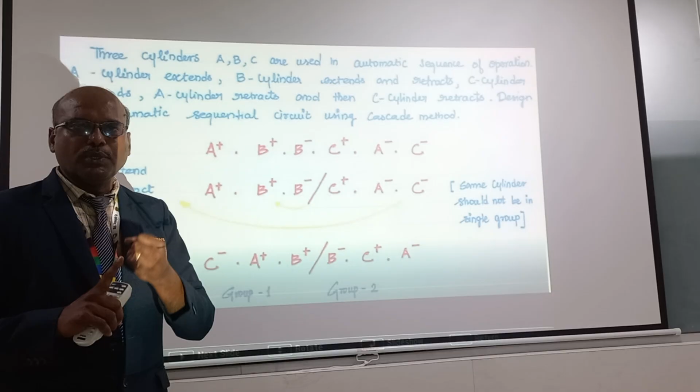First I told 5 steps. First one is forming a group. To form the groups, I should have the minimum number of groups. Second, no letter should be repeated in the same group. These are the 2 main conditions. So I am going to start the group now. First I write A plus, then B plus. B minus I cannot write, because as per the rule no letter should be repeated. So A plus and B plus are the first group.

So group 1. Then I start B minus, C plus and A minus. These 3 letters can be included in a single group, so this is group 2, and C cannot be included here because C is repeated. So C minus goes to group 3. That is A plus B plus is the first group, B minus C plus A minus is the second group, and C minus is the third group.

Now my objective is to reduce the groups. Now it is 3 groups. I have to reduce the 3 groups to 2 without changing the sequence. So I am going to bring C minus to the front. Now I can write this group as C minus, A plus, B plus. Now also I am not changing the sequence. Once C is over, only then A is going to start.

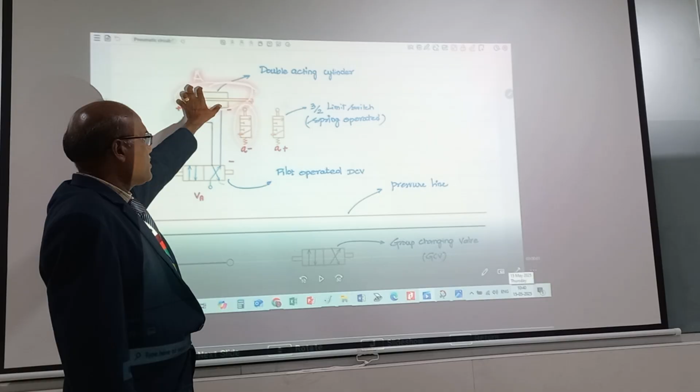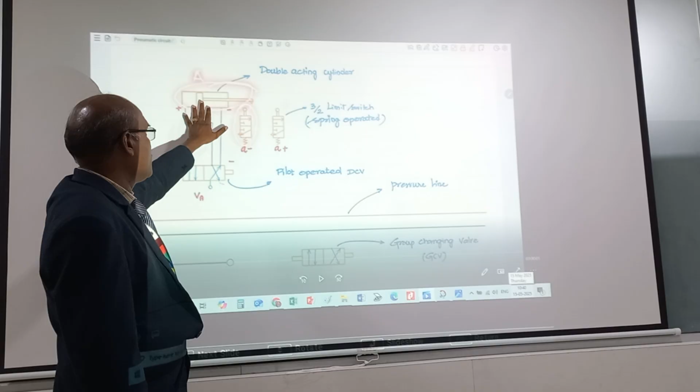So the double acting cylinder is required. Normally a double acting cylinder is used for any operation instead of a single acting cylinder, since it can be retracted or extended at will. Each double acting cylinder will require 2 limit switches. That's called a 3x2 limit switch. This is a spring operated limit switch, a 3x2.

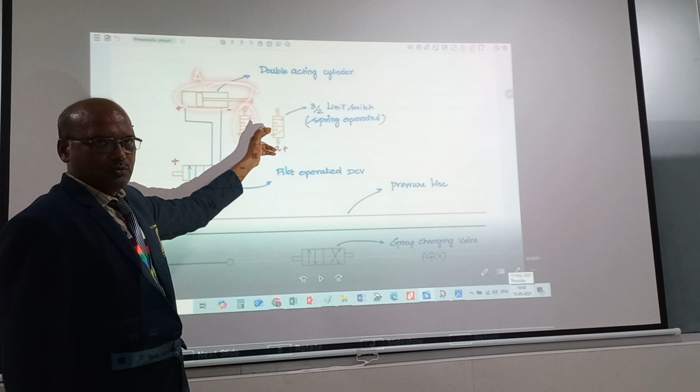Like the DC valves, you are having 2x2, 3x2, 4x2, 5x3, 5x2, 5x4; a lot of valves are there. Here you are using 3x2, a spring actuated DC valve. And each cylinder requires one DC valve. This is 4x2. Here also you have 2x2, 3x2, 4x2, 5x2. Here you are using a 4x2 valve.

4x2 means 4 ports and 2 positions. The ports are the 4 openings for the fluid to move: 1, 2, 3, 4. And it can operate in 2 positions, right mode and left mode. So it is called a 4x2 DC valve. It comes under pilot operated DC valves.

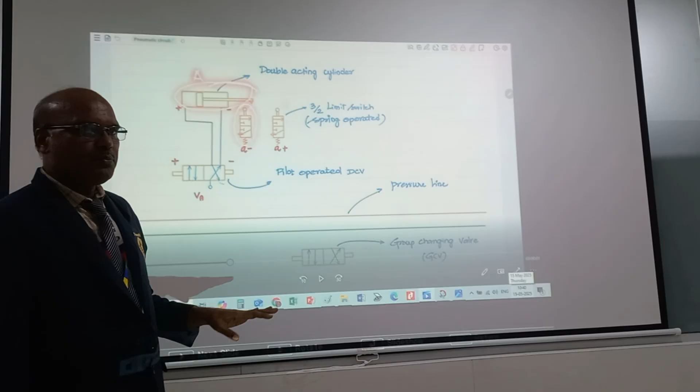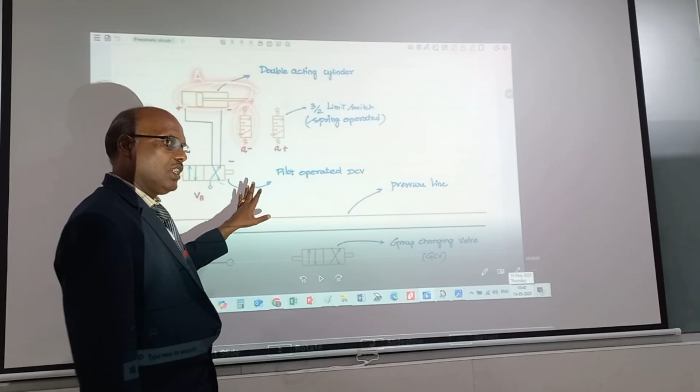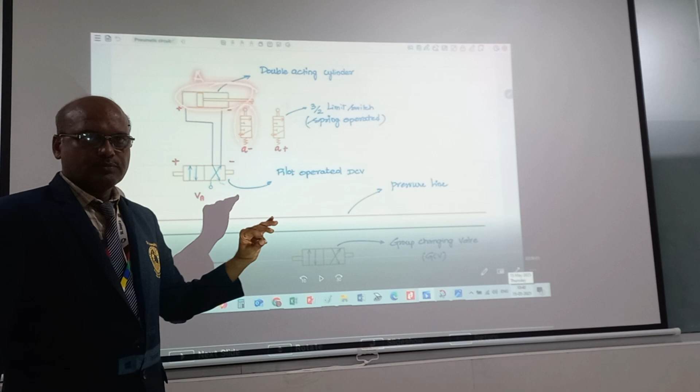What does pilot mean? There are several types of operation: manual operation, plunger operated, lever operated, a lot of operations. Here it is pilot operated. Pilot means moving the DC valve with fluid, either left or right. So here we have pressure lines that you have to draw. We will see how many pressure lines are required.

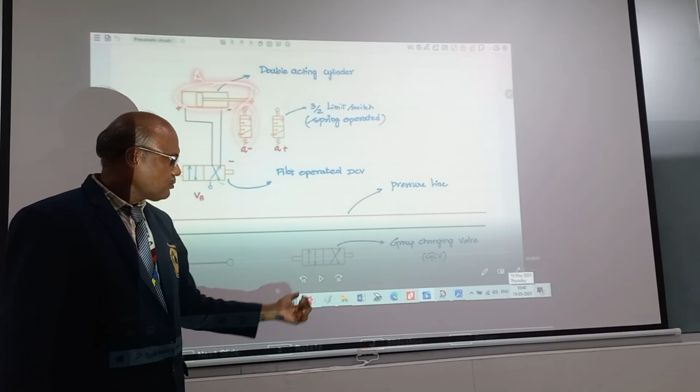And here I have one group changing valve, the cascade valve. This is also a 4x2 DC valve, similar to this DC valve. This is the main valve that changes from one group to another group. That is our group changing valve. Sometimes you may need 1 or 2 based on the calculation. These are the basic elements required for our design.

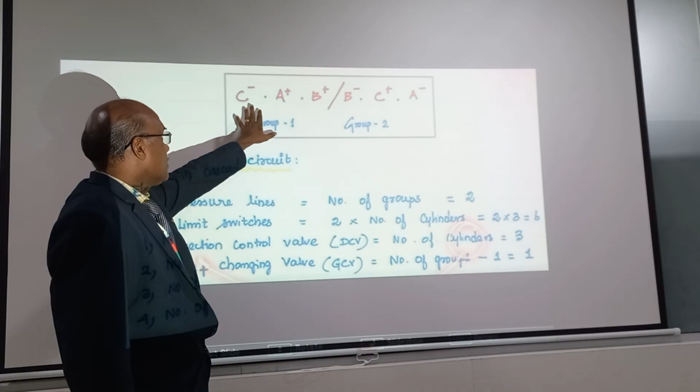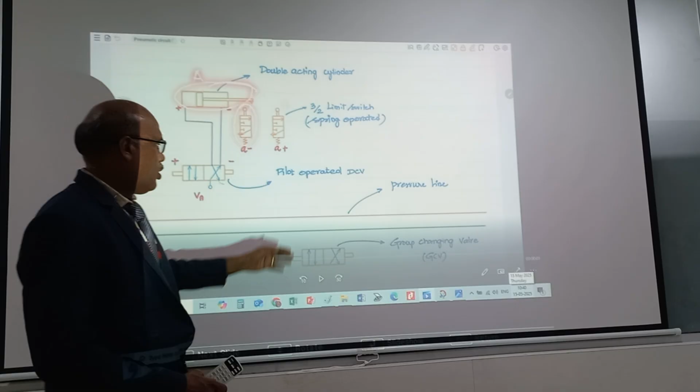Now we see the rules for the elements required calculation. Initially you have found out and decided group 1 and group 2, with no letters repeated. Then first you have to find the number of pressure lines required. The number of pressure lines is based on the number of groups. Since you have 2 groups, you require 2 pressure lines.

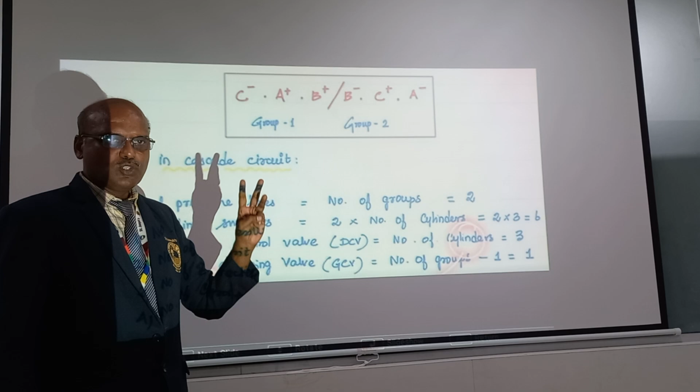Then the number of limit switches. Each cylinder requires 2 limit switches. We have 3 cylinders, so we need 6 limit switches: 2 into number of cylinders, 2 into 3 equals 6. Then you have to find how many direction control valves are required. Each cylinder requires one DC valve, so 3 DC valves are required. Number of direction control valves equals number of cylinders equals 3.

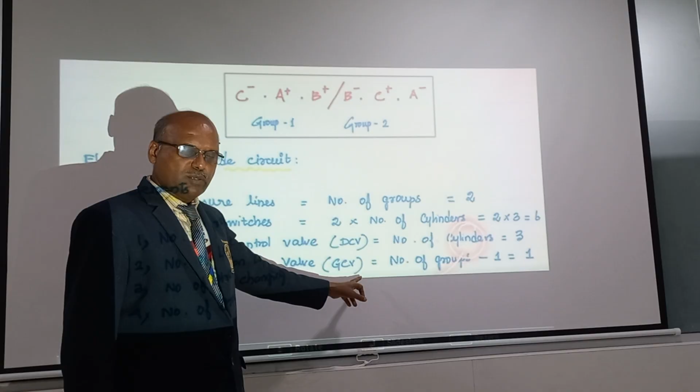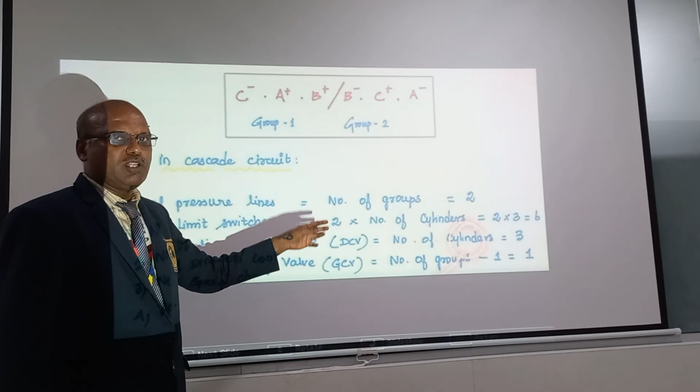The last one is the number of group changing valves, that is the number of cascade valves required, which equals number of groups minus 1. You have 2 groups, so 2 minus 1 is 1. That is my initial calculation. If you make any mistake in this calculation, your circuit will not come out correctly. So make sure you do not forget this formula before going to the change valve. Okay.

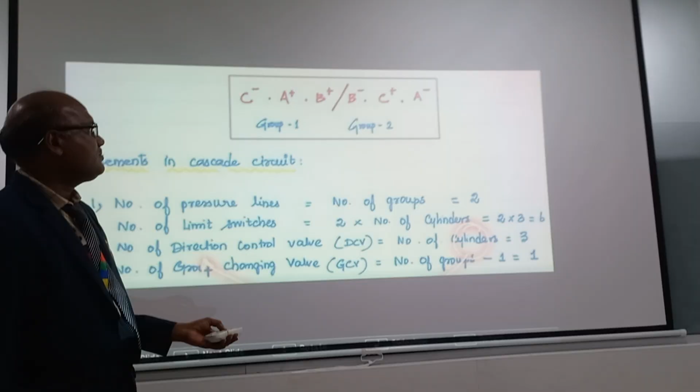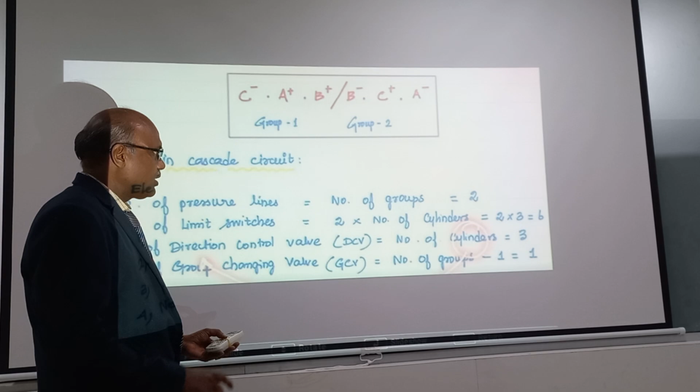Now we will go for the connection. We have seen all the rules and regulations for the formulas. Now we will go to drawing the components. Take the landscape page in the paper, in the exam hall itself. Take the landscape page, don't go for portrait, since you have to draw 3 different cylinders in a horizontal manner. Use the scale and pencil to draw these DC valves, and you can use multiple color pencils in the final to show the difference between group 1 and group 2 changing.

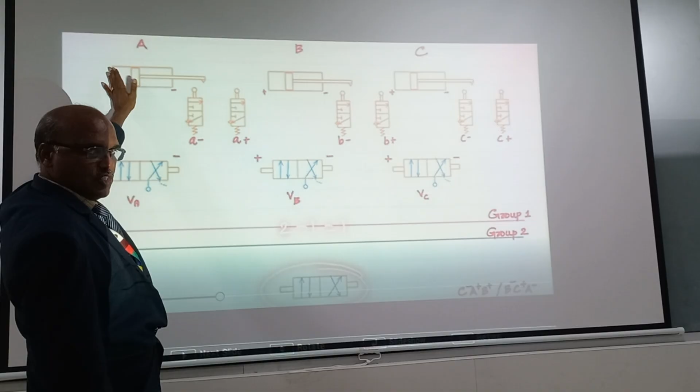As per the formula, we need 3 cylinders. First draw 3 double acting cylinders, give the names A, B, C, and put plus and minus at both ends. Plus represents extension. If you give input to this side, it will be extended. If you put input to the right side, it will be retracted. That's the meaning of plus and minus. So put plus and minus to all 3 cylinders.

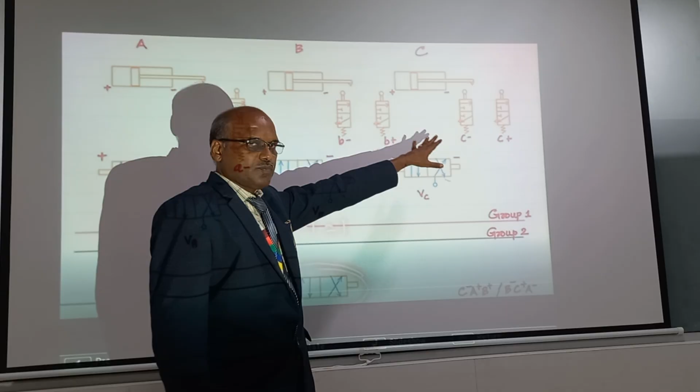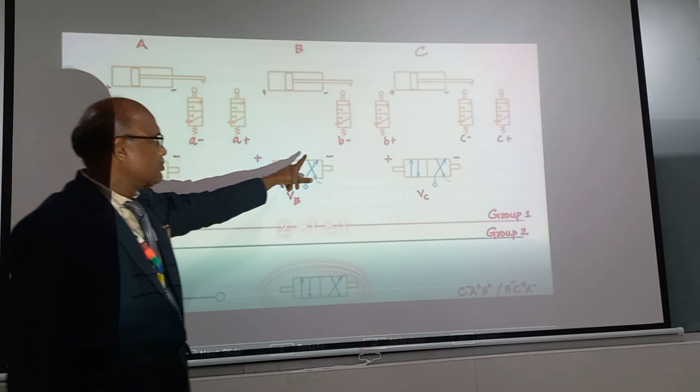That's the first step. Second, each cylinder requires 2 limit switches, which should be 3/2 limit switches. Draw one near the back end and another somewhat distant at the front. Similarly, draw 2 limit switches for each cylinder. Draw them as spring actuated and mechanically operated, and label A minus, A plus, B minus, B plus, C minus, C plus. A minus means this limit switch gets energized when A is retracted. A plus gets energized once A is extended.

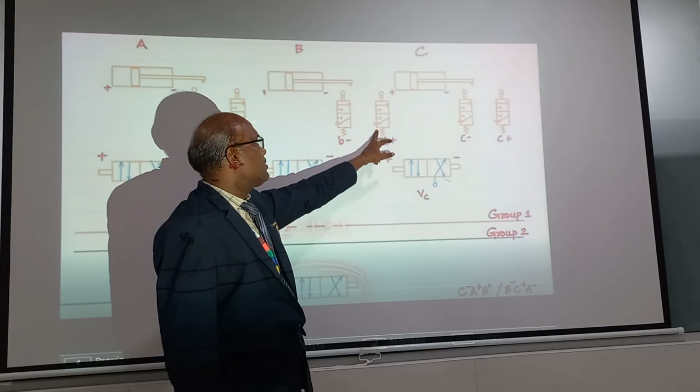Similarly, B minus means once the B cylinder retracts, B minus is energized, it will operate and flow will pass through the valve. B plus means once B is extended, this will be energized. Similarly, C minus and C plus. That is the limit switch.

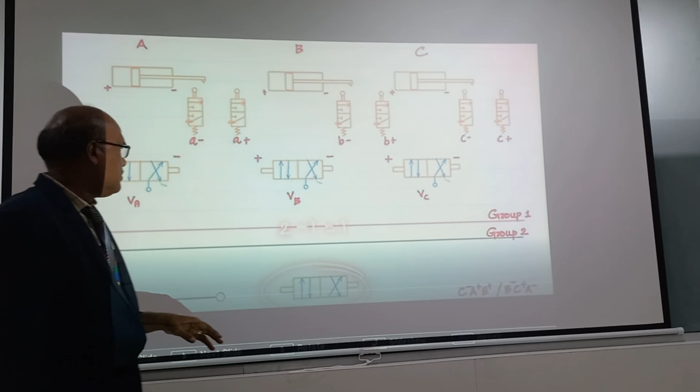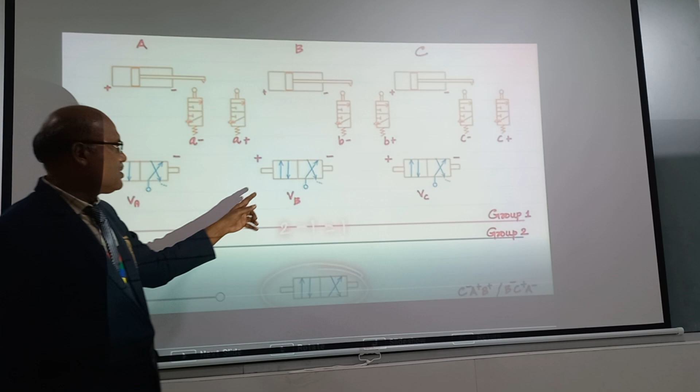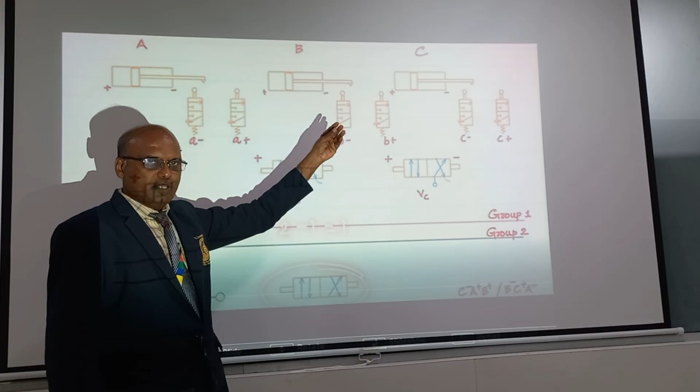Put the high pressure line input here, marked P. Then put plus and minus. This plus and minus represents that if you want the cylinder to extend, you have to give the input to this side. For clarity, give the initial markings like this. If you want to extend the B cylinder, give the input through this side. It represents plus here and minus here, making it easy to draw and connect the lines. For all the cylinders, mark plus minus like this.

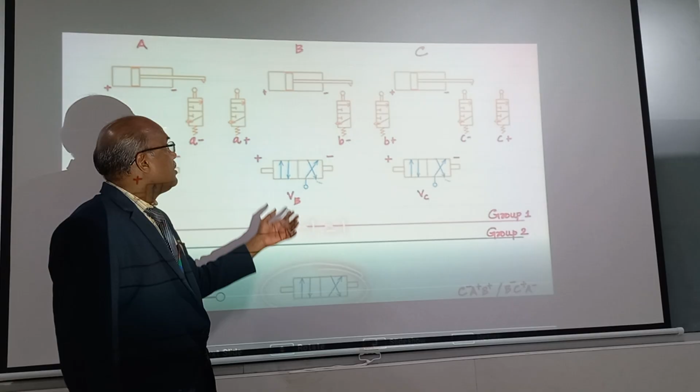Now, as per the rule, you have 2 pressure lines. Draw 2 horizontal lines and mark them as group 1 and group 2. The last one is the cascade group changing valve, so draw a cascade group changing valve. These are low pressure line valves, operated by the low pressure line, while these are operated by the high pressure line. See the difference.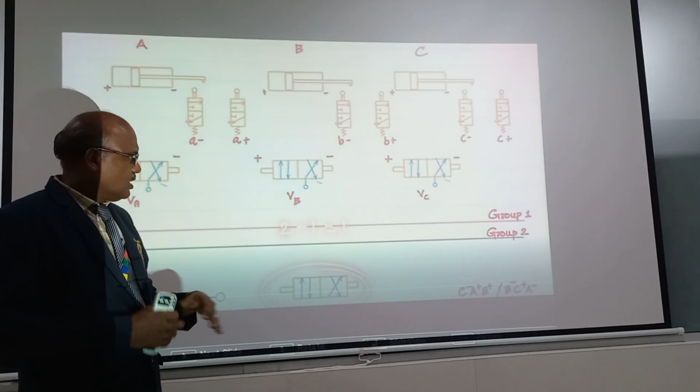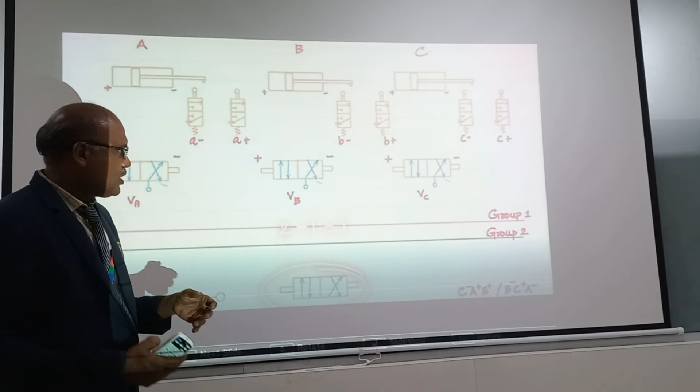Since the cylinder experiences the external load, say for clamping, we need higher pressure. But for moving the DC valves, we need a low pressure line. Bigger machines or JCBs usually have 2 pumps, a low pressure pump and a high pressure pump. The low pressure pump serves the cascade valve and group valves. The high pressure pump handles the external load on A, B, C. That is the initial arrangement; give proper names. Write your sequence below: C minus, A plus, B plus, B minus, C plus, A minus. This is the required sequence.

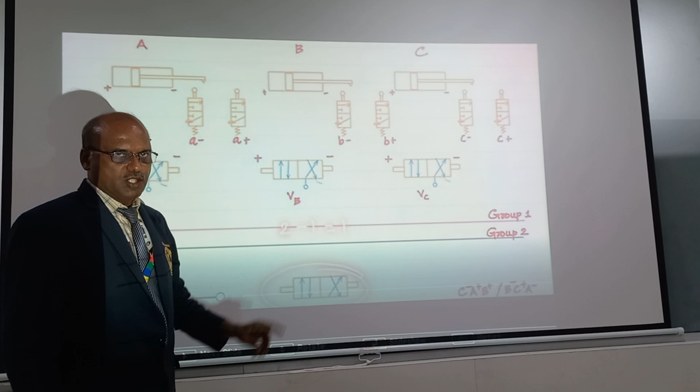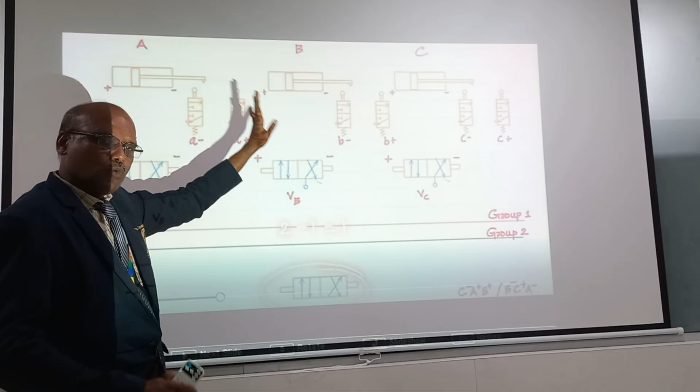When I switch on my cascade valve manually, immediately C has to retract. Always draw your A, B, C cylinders in the retracted mode, not the extension mode. Your piston should always be at the left end. That is the rule of circuit design. When I switch on this cascade valve, C minus has to occur, C has to be retracted. So this has to be connected here.

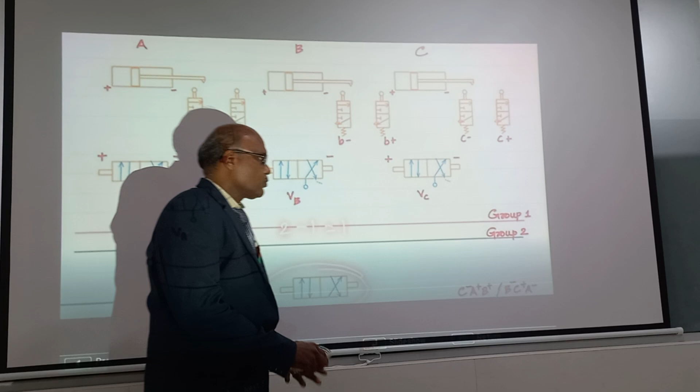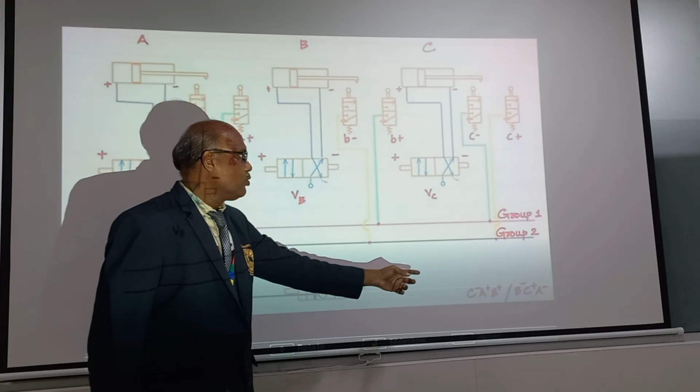Now initially you give some dummy lines from group 1 and group 2. Dummy lines means to actuate. So group 1: C minus, A plus, B plus. From group 1, C minus, that is, say, the green line: C minus, A plus and B plus. All three limits should be connected to group 1. So this is a dummy line given. You can see it cannot flow.

Once the limit switch is energized, when it is depressed down, spring actuated, the flow will be here and goes to here and goes to the output. Only once it is depressed will this work. Otherwise, it will be locked here. So from group 1 it has to be connected.

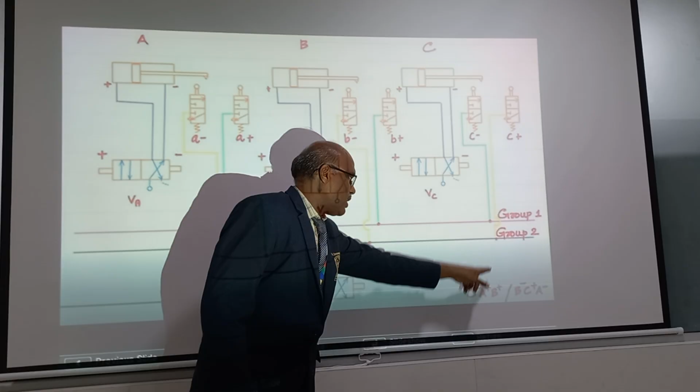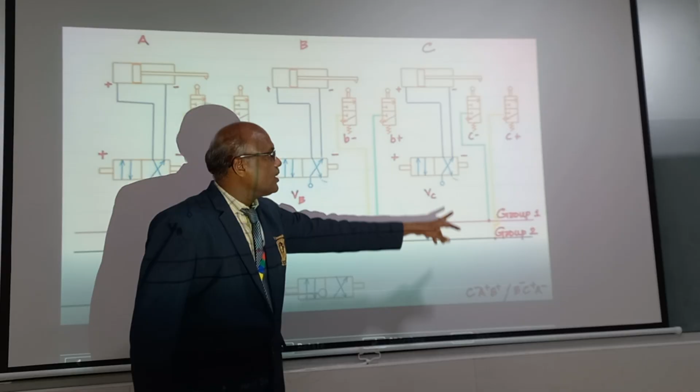Similarly group 2, see the yellow line. So B minus, C plus, A minus. This yellow line is A minus, this yellow line B minus, the yellow line C plus. That will be initially given as a dummy line. Since you are not switching on the operation now, since you have not started, it has to be given connection.

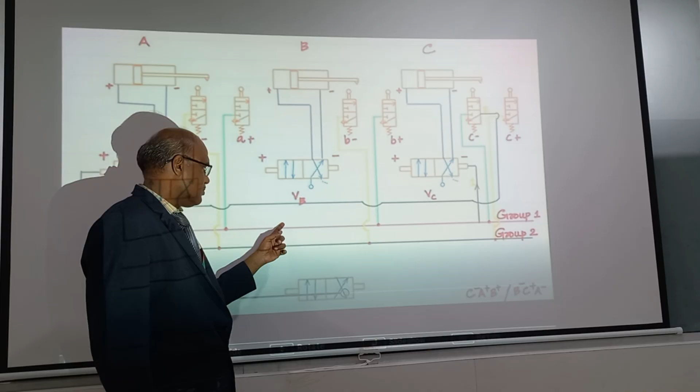So what we should do is, I want to do C minus. Once switching on the cascade valve, I have to go C minus. So once you switch on here, now group 1 gets energized, and a direct line has to be given from group 1 to the C minus. This should always be in the retracted mode at the starting of the operation. So directly from group 1, this valve is given connection.

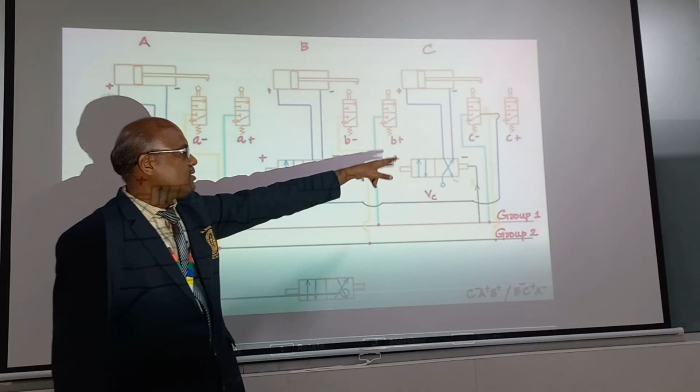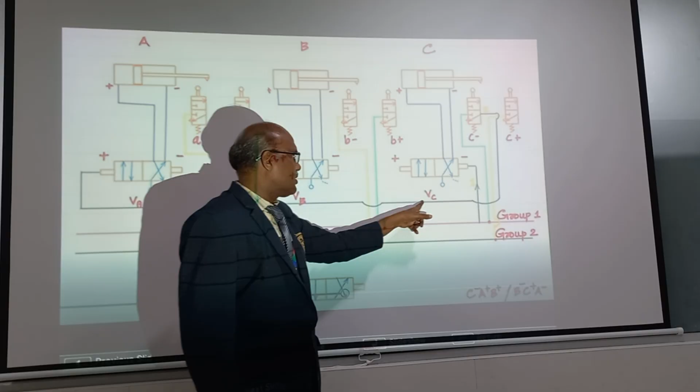So C minus. Now next A plus has to be carried out. Once C retracts back, this will hit the limit switch C minus here. Already I have given some dummy line, the green line. Once it is depressed down, the line from here will go to here, and this will give some output. The output should carry out A plus. See the output of the line, it goes here, comes like this, and goes to A plus.

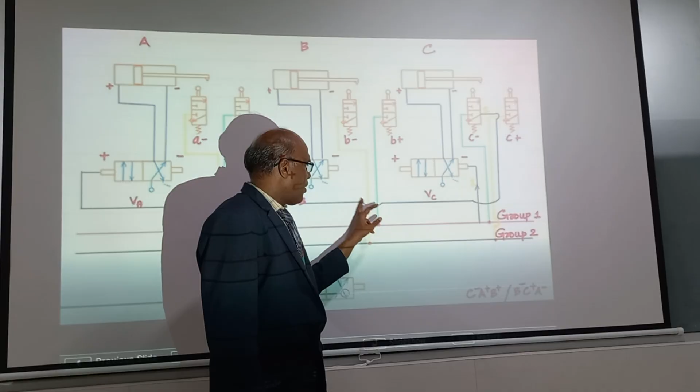Whenever you are crossing the line in the circuit, you make the hurdle like this, a semicircle, like the electrical circuit. For a pneumatic circuit also you should not draw a straight line. This will create confusion about where the line goes. So you draw a semicircle hurdle line like this and go for the A plus.

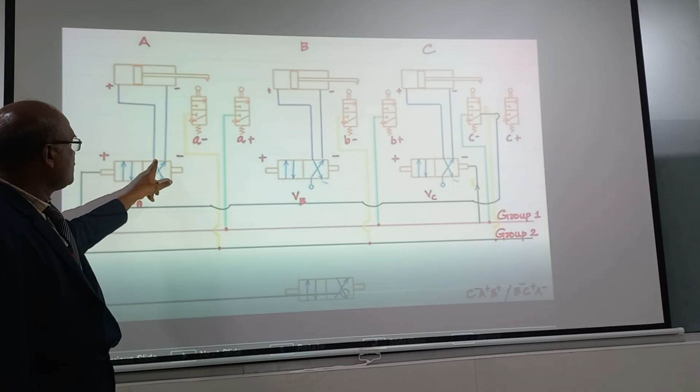Now this valve changes to the left mode. This will be moved to this port in the left mode. Now the high pressure line from here will go to here, and it goes to the piston of A, and A extends. Once A extends, it will hit the limit switch A plus here.

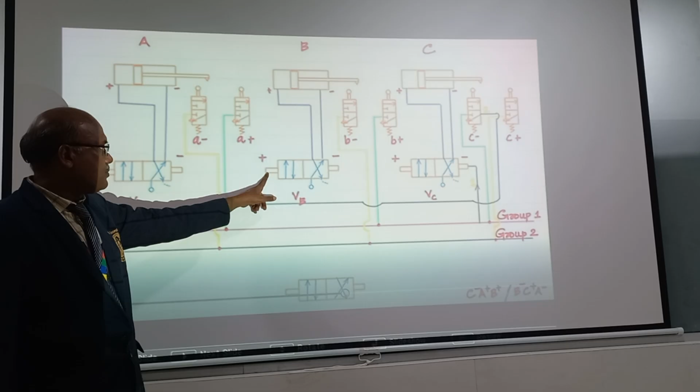Once A plus is hit and depressed down, already I have given some dummy line from here. So now this will get connected. This will support what? This will support B plus. So the output of the line should be given to B plus here. You have to give the line like this.

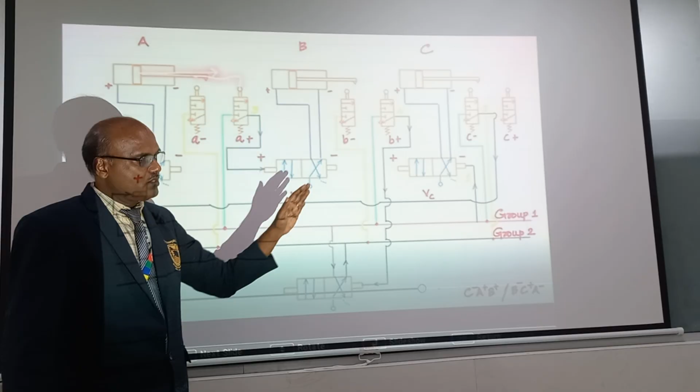Now this will be shifted to left mode. Now the high pressure line from here goes to here, and it goes to the piston of the B cylinder. Now the piston of the B cylinder extends. After that, what has to be done? You have to do the B minus.

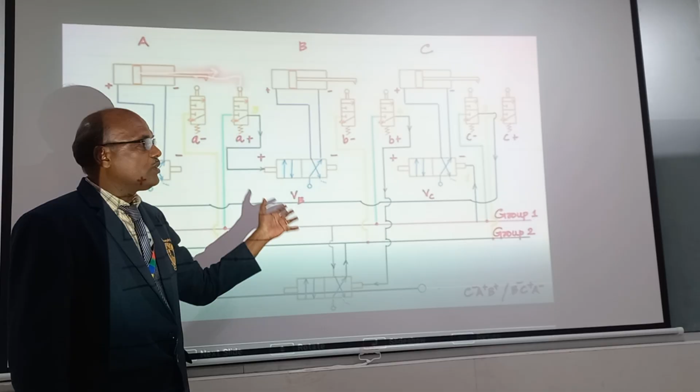Before that, the group is over. See the slash. Slash means group over. Once the group is over, you have to go to the cascade valve. It has to go to the cascade, it should not go to the next cylinder. So that is B plus over, that is, B extended.

This will hit the limit switch B plus here. Already given some dummy lines, and once it is depressed, energized and connected, the output of B plus has to go to the cascade valve here. See how the line is connected. It's not a straight line, and you can put some arrows also.

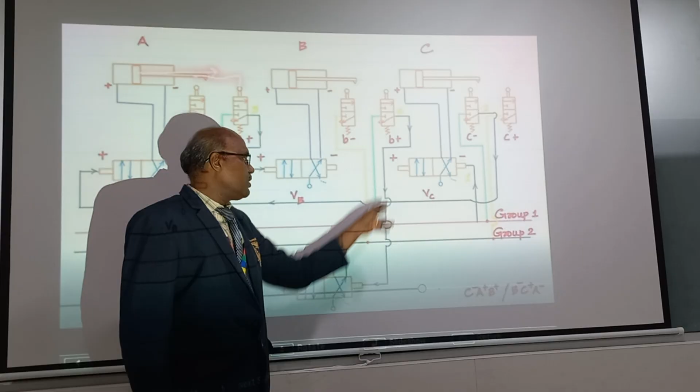So from where the line is going, from here it is going there, or here it is going. If you have some reference, you can put a small arrow mark also.

Cascade valve. Once the cascade valve hits, the position of the cascade valve changes to left mode. So the mode is changing. So once the mode is changed, from the group, the pressure line, group 1 all will be going out.

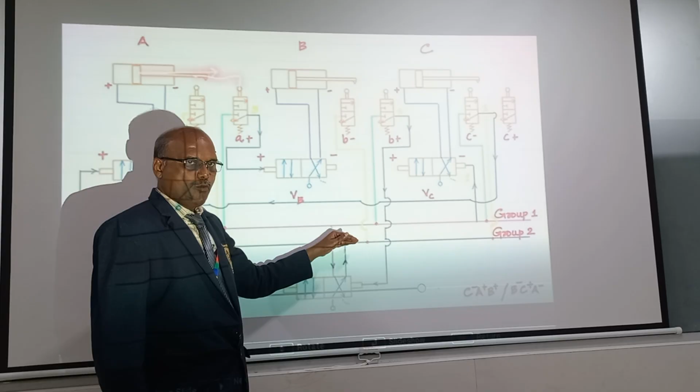The pressure line, group 1, all will be going out. So now group 2 will get energized with the high pressure line. So once group 2 started, what will happen? It has to go with B minus. Once group 2 starts, it has to go with B minus.

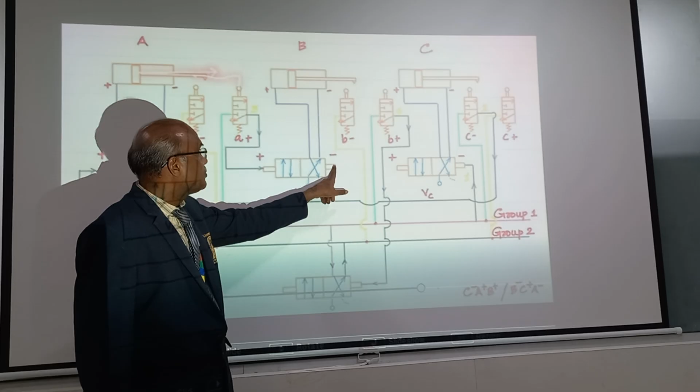So directly I have to give the line from group 2 to B minus, direct to group 2. So you can write like this. So directly I am going to give from group 2, a line has to be drawn like this to group 2.

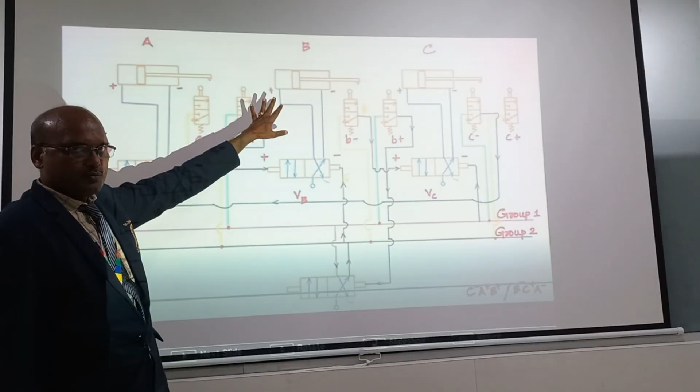Now the valve B will come to the original position, and the high pressure will go from here to the rod end of the B cylinder. So now the rod end of B cylinder retracts, left mode. Once it retracts left mode, this will hit b minus, the limit switch b minus.

Limit switch B, what has to do? Then C minus has to carry out. Once B minus is over, C minus carries out. The output of the B minus limit switch should help C minus.

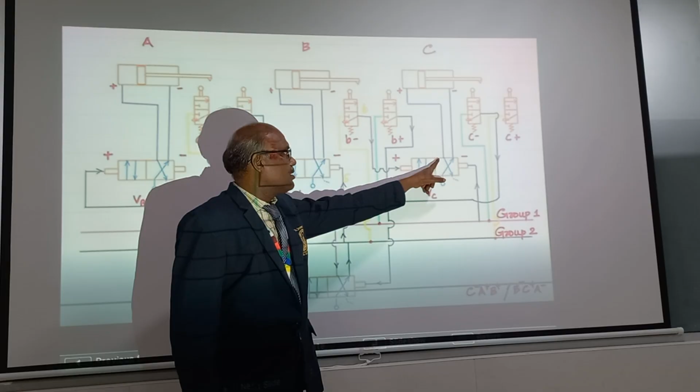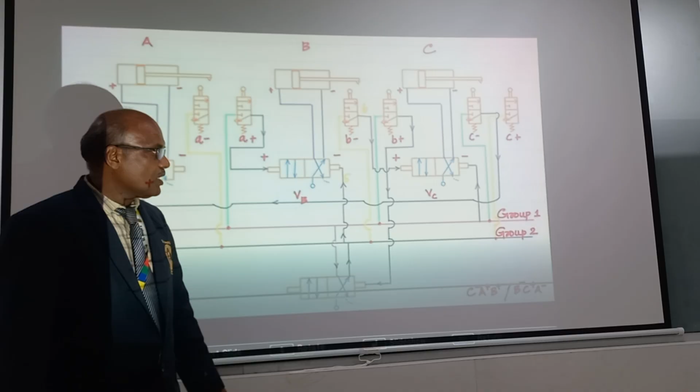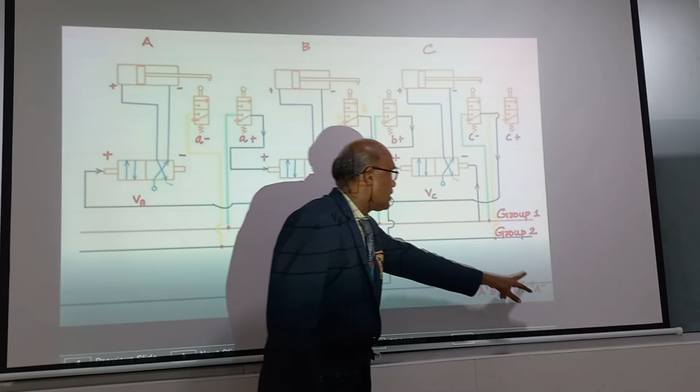What should happen? After C plus, A minus has to occur. So I should connect the output of the C plus to A minus here.

Since there are a lot of lines moving here and there, be careful in drawing the lines. Make use of the full page of the paper. Draw the cylinder at the topmost, the cascade valve at the bottommost, near the cascade valve draw the pressure line, then make a big space between the DC valve and pressure line so you can draw multiple lines here.

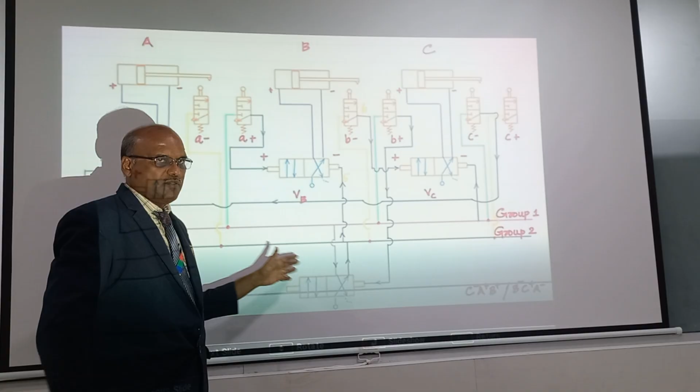So the output of the C plus limit switch should go to A minus, so you have to come here, see how you have to mark it. So output of the C plus, once it is depressed, it has to come and move to here, and goes to A minus. The output of the C plus has to get to A minus.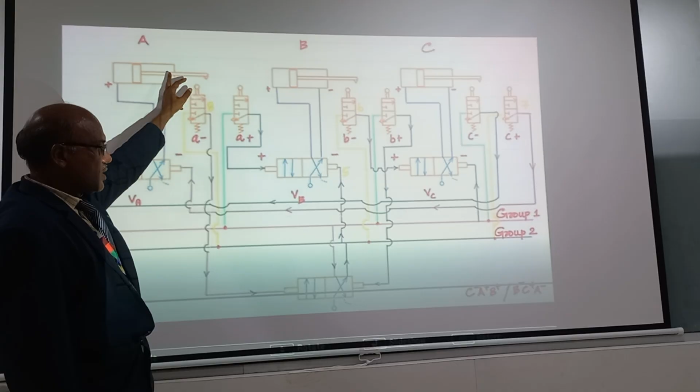Now this will be changed to right mode once again. The impulse line from here goes to the rod end of the cylinder, and A is retracted back. So once A is retracted back, the group is getting over.

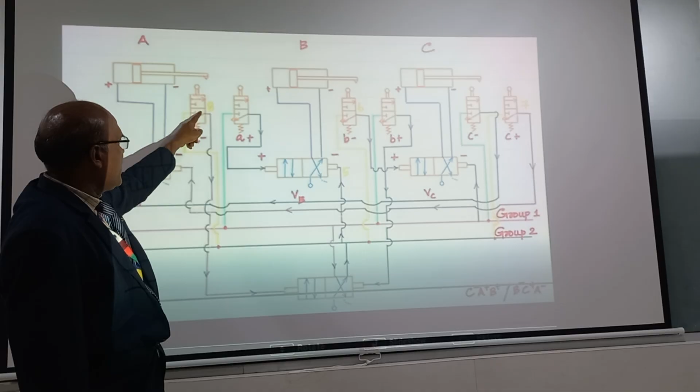So what happens? Once the group is getting over, it has to go to the cascade valve. So once A minus occurs, this will be the limit switch, and once it's depressed, the output of this line will go to the cascade valve once again, since the group is over.

This was the simple system of design. You should be careful to use the scale to draw the diagram, and you should not confuse with the movement of the fluid lines. Give a clear arrow mark line, and you can use multiple colors to show the group 1, group 2 variation, or you can use dotted lines also.

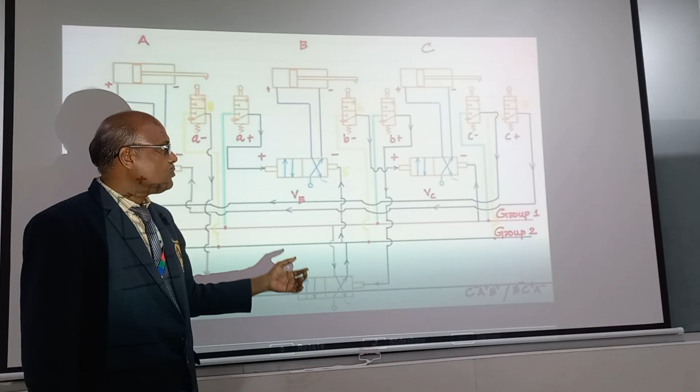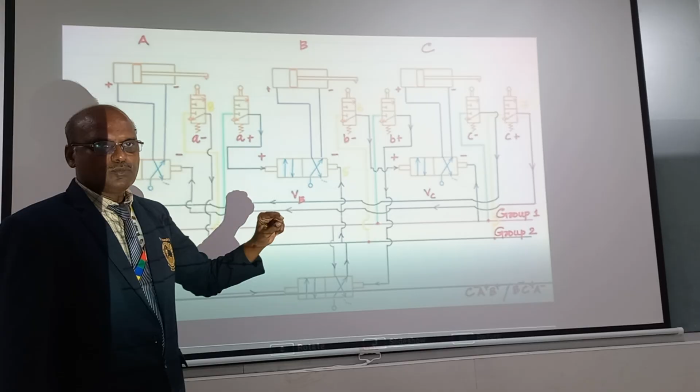In some reference, some textbook diagrams, you can see for group 1 a single thick line, or for group 2 they may use a dotted line. Okay, use dotted line also for your diagram.

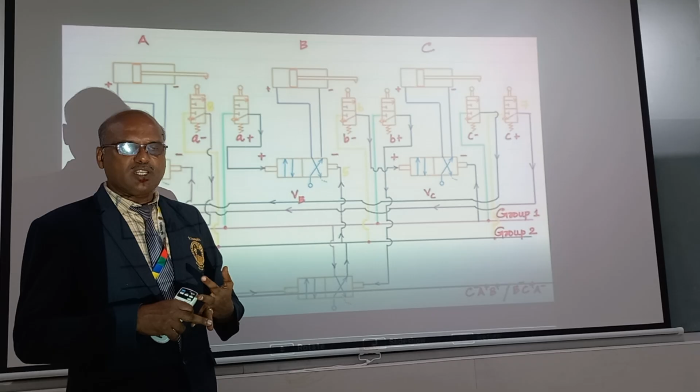So it should be made clear. Before that, the formula is very important, how you are going to calculate. Similarly, if multiple cases arise, you may form 3 groups, you may require 2 cascade valves. Based on the same concept, you have to follow. Whether it's cascade valve 1 or cascade valve 2, the procedure will be the same for all. Once you understand all the problems, you will easily design your next circuit.

Okay, so I will recap what you are doing so far. Once I recap, you will understand what you have learned so far. So the problem is given like this.

Sometimes the problem is given in paragraph format also. A bigger passage will be given. So you can simply read it and write like this. Don't get upset on seeing the big 4 or 5 lines of questions. This will be easy. Once you read, you write like this.

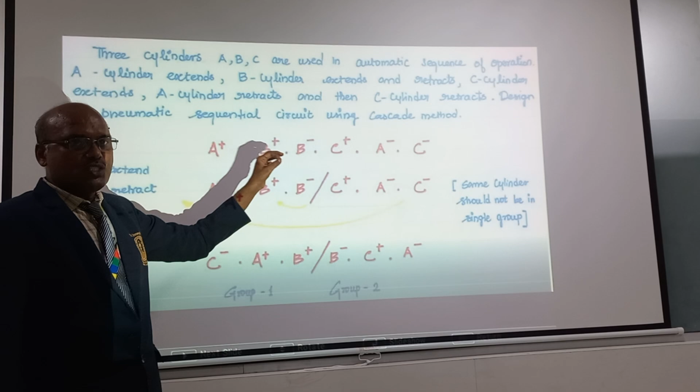Simply you can write A plus, B plus, B minus, C plus. Whatever the question given, you write it here without changing the sequence. That is very important. The sequence of operations should not be changed.

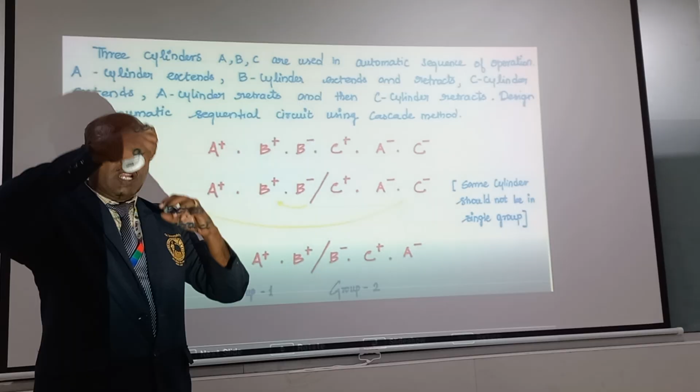Once the clamping workpiece has to be loaded, clamping has to be done, drilling has to be carried out. So one set, group 1, for example. Then the drill bit has to be moved out, clamping has to be removed, clamping has to be taken back, then workpiece has to be removed. This is another set of operation. That is A plus, B plus, C plus, then C minus, B minus, A minus.

So for this example I am telling. Similarly, different operations will be there. For all the automation operations nowadays we are using pneumatic cylinders, for multiple operations. In all robotic operations, quality inspection, assembly, a lot of pneumatic cylinders are used. So how it has to operate based on the sequence, you have to make.

If it is properly operated, easily you can arrange your cylinders also based on 4 conditions: safety first, second is performance of desired function, third is efficiency, fourth is cost. Based on these 4, you have to follow this.

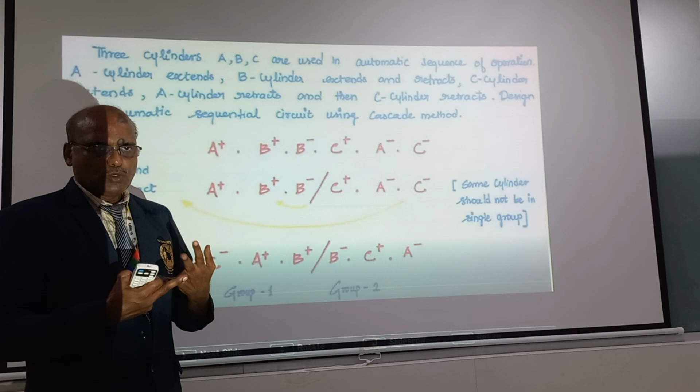Okay, so I will recollect how to form a group, the group changing group. To form the group, there are 2 conditions: one is no letter should be repeated, and you should have a minimum number of groups. You should not form 3, 4, 5 groups as you like. If you increase the number of groups, you may need more cascade valves, more pressure lines. You should make a minimum number of groups, and letters should not be repeated.

So here what I explained is, I will explain the group once again. Once I write the sequence continuously as per the problem given, then you start forming the group. So A plus, B plus - I cannot include B minus, stop with B plus as 1 group. Then you start group 2: B minus, C plus, A minus and C minus. C minus cannot be included. So these 3 letters are group 2, and last C minus is allowed in a single group.

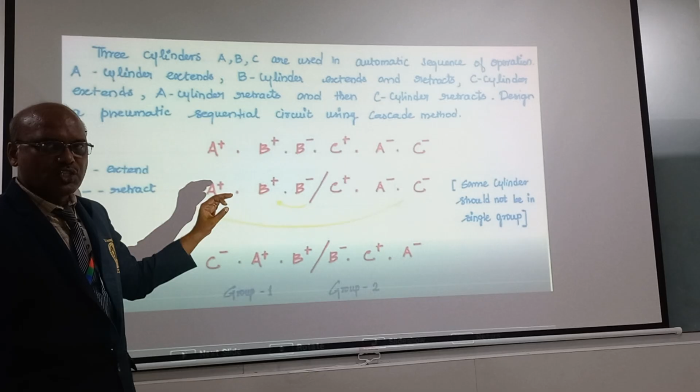So my rule is I have to reduce one group. So what I do is I will put the C minus here. Once I fit the C minus here also, I am not changing the sequence. So now also C minus, A plus, B plus. After C minus, anyway A plus is going to occur.

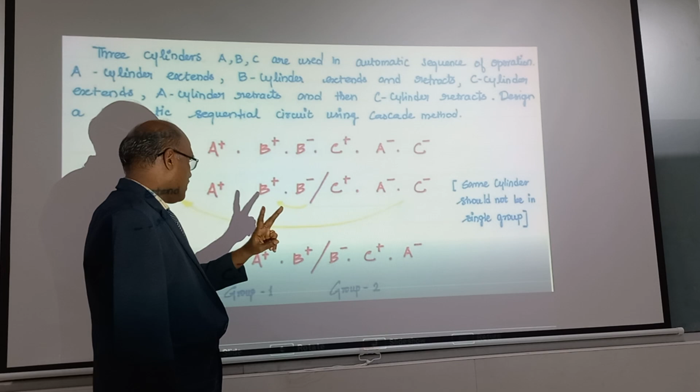Here also same, but I reduce one group. I reduce one group, I save my cost. Cost of cascade valve is reduced, cost of pressure line will be reduced. So everything will be reduced. So now instead of 3, I am going to 2 here: C minus, A plus, B plus, B minus, C plus, A minus. So this is the forming of the group.

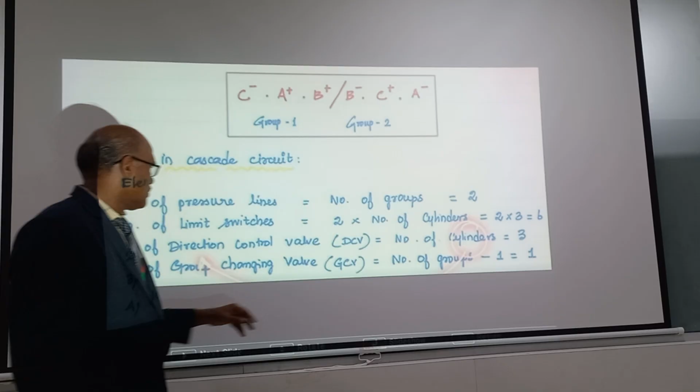So many students get confused on creating this group itself. If you are able to form the group properly, the remaining work will be much easier for you. Along with this, these four - number of pressure lines based on number of groups, yes we reduce the group. So two things you can reduce the cost: number of groups, number of limit switches, number of direction control valves, number of group changing valves. If you form these things, you can easily draw the circuit and easily score the marks.

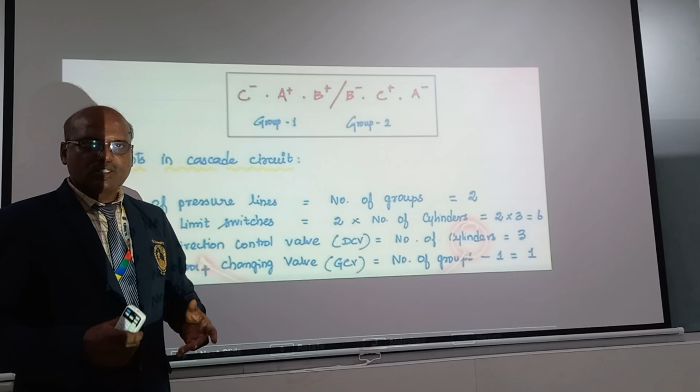So I hope you understood the 3-cylinder method of the cascade method. We will meet you in the next video for designing with more cylinders. So thank you.